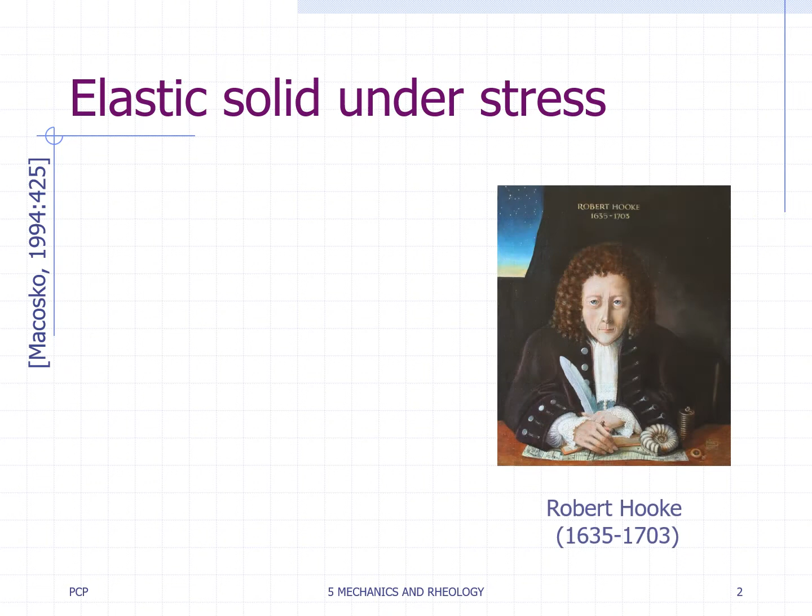Our story begins with an English scientist, Robert Hooke, who discovered a direct proportionality, called the modulus of elasticity E, between the applied stress sigma and the deformation or strain of a solid epsilon. Under these conditions, the object returns to its original shape and size upon removal of the load and might be called a linear elastic or Hookean body.

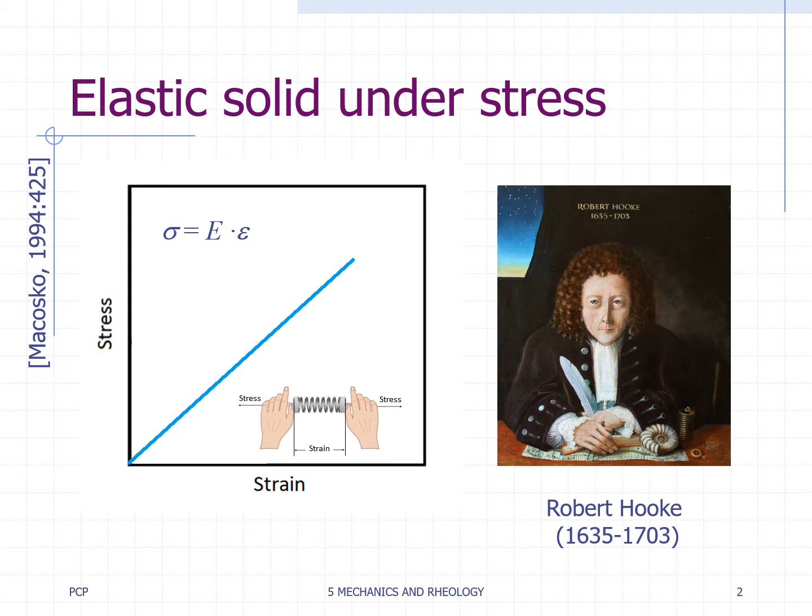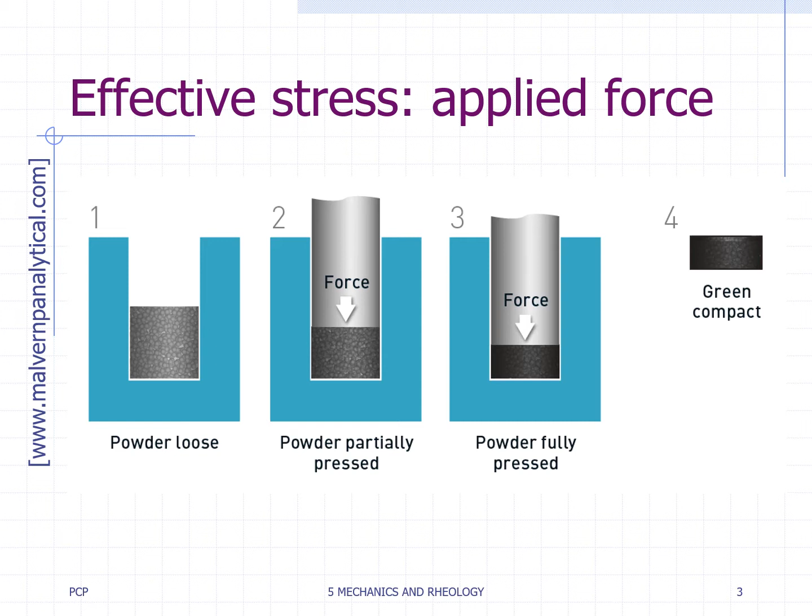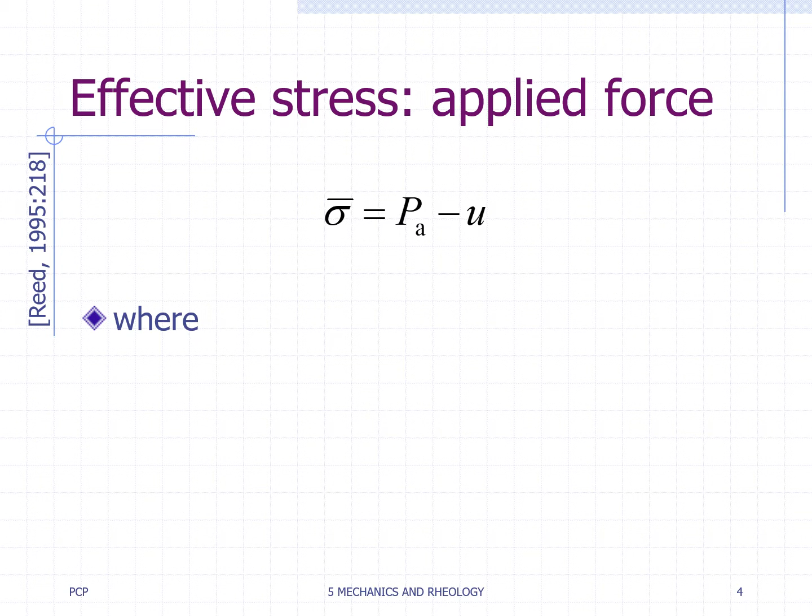Ceramic bodies containing a pore phase incompletely saturated with a liquid can be deformed both elastically and plastically when compressed. For those materials, the resistance to deformation is dependent on the cohesive strength and the frictional resistance between particles. When an unsaturated particle system is compressed, the imposed pressure is supported by the mechanical stress at particle contacts and by the pore fluid pressure. The difference between the applied pressure, Pa, and the fluid pressure, U, is called the effective stress, sigma.

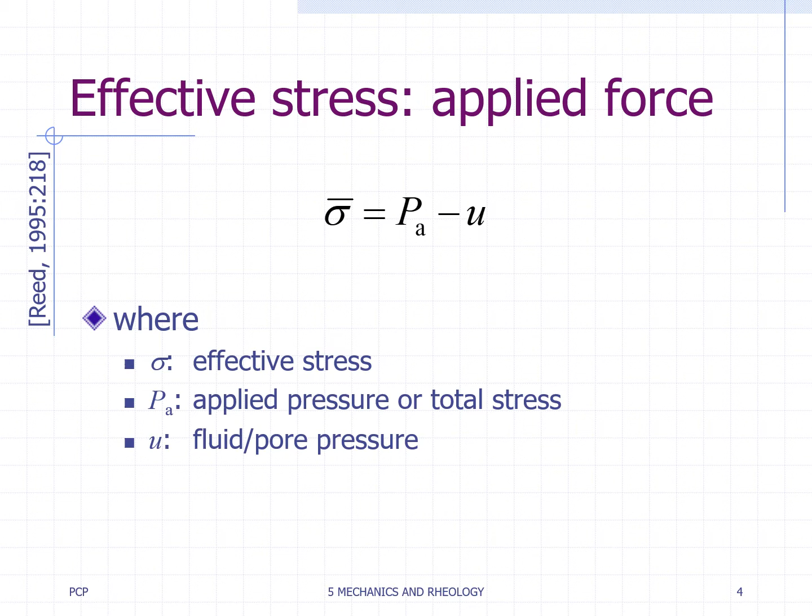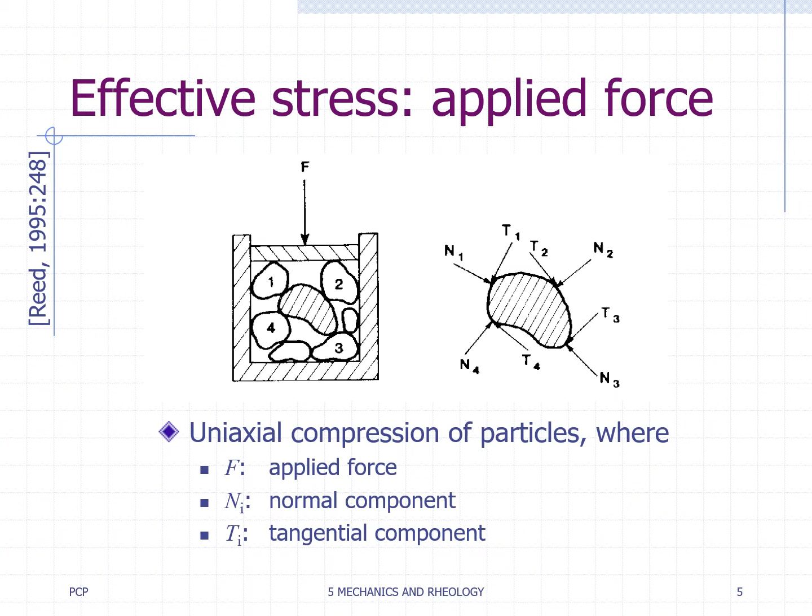Let's consider the uniaxial compression of a system of particles confined in a rigid die, as shown in this figure. The force at contacts between particles may be resolved into normal N and tangential T components. A very intense stress at a particle contact may cause local plastic deformation and fracture. The effective stress is lower when the pore phase is saturated with a relatively incompressible fluid that becomes pressurized, as is indicated in this figure. The chart shows a variation of stresses and porosity on loading a compressible, partially saturated particle system. Permeable pistons or dies may determine the effect of drainage of the pore fluid on the mechanical behavior.

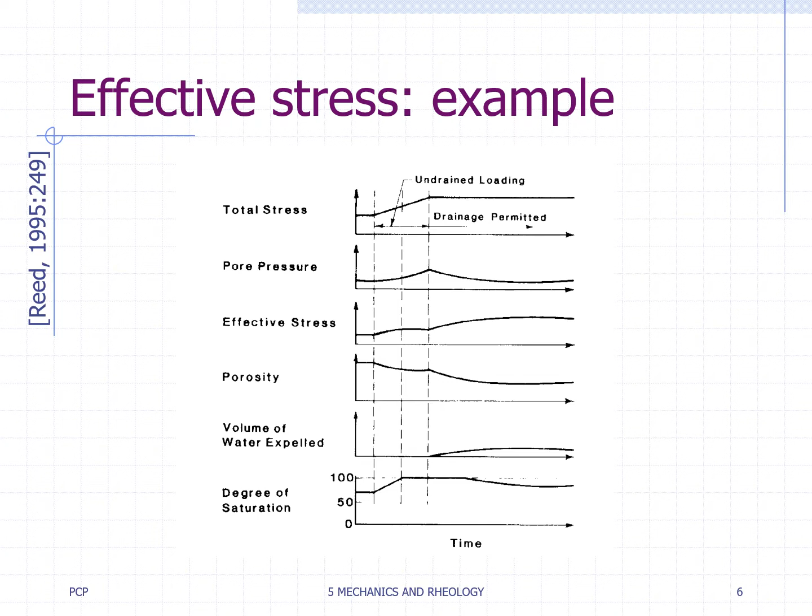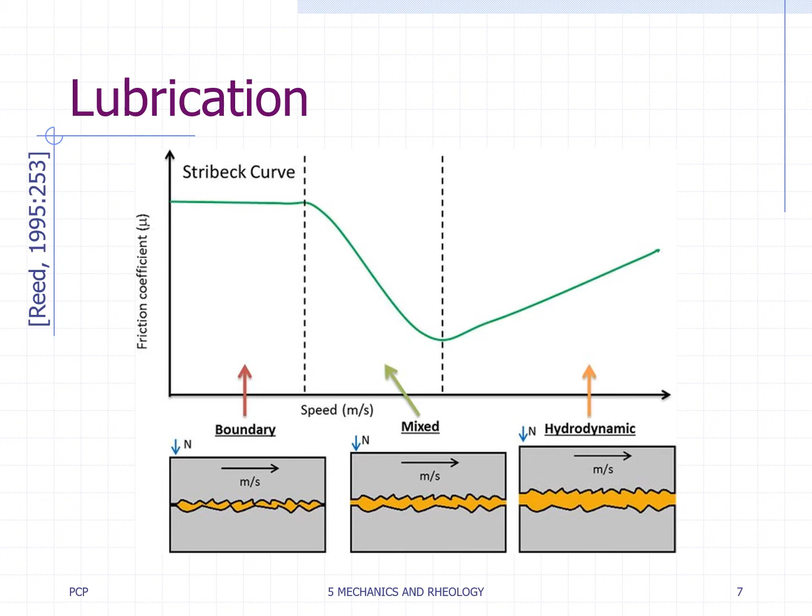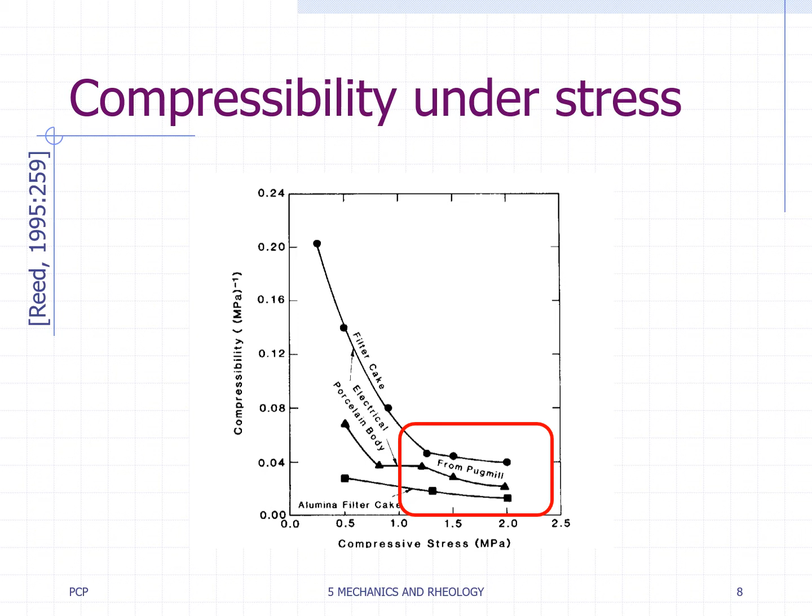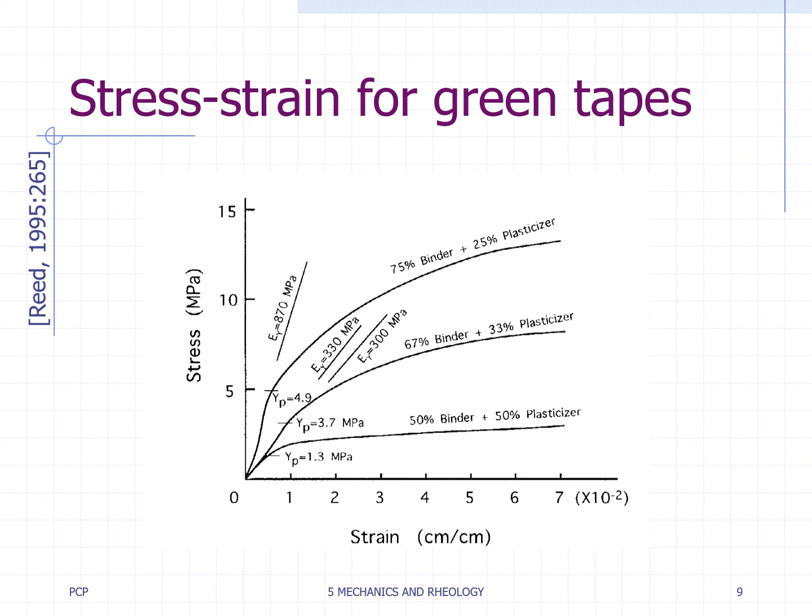A typical stress-strain behavior in simple tension of dried ceramic tapes for electronic substrates shows the effect of increasing plasticizer proportion on decreasing yield point, Yp, elastic modulus, E, and ultimate strength. From now on, we will discuss fundamentals and techniques used to determine the rheological properties of saturated systems, that is, with DPS equal to or larger than 1.

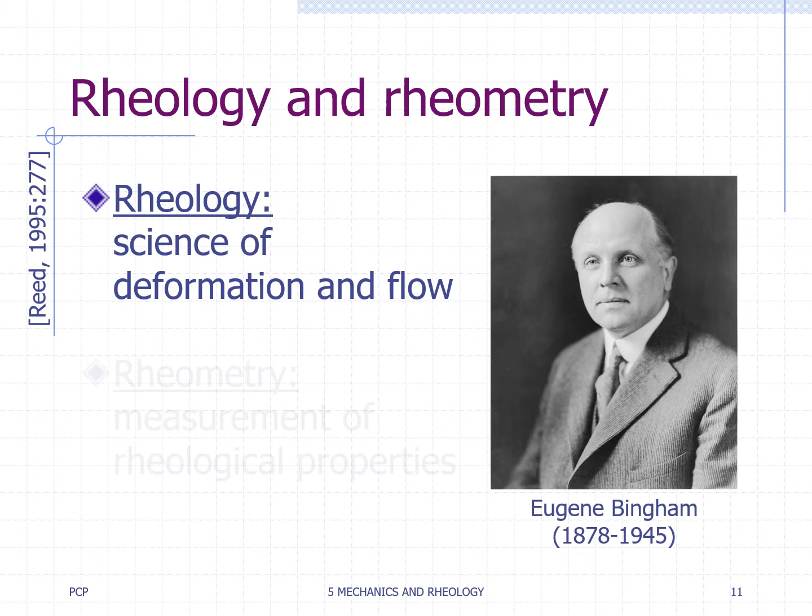By the way, the term rheology is related to the science of deformation and flow, as coined by Eugene Bingham, an American chemist. On the other hand, rheometry refers to the measurement of rheological properties. Rheology is a science that has been defined by many contributions, including from the supposedly two most important physicists ever, Sir Isaac Newton and Albert Einstein.

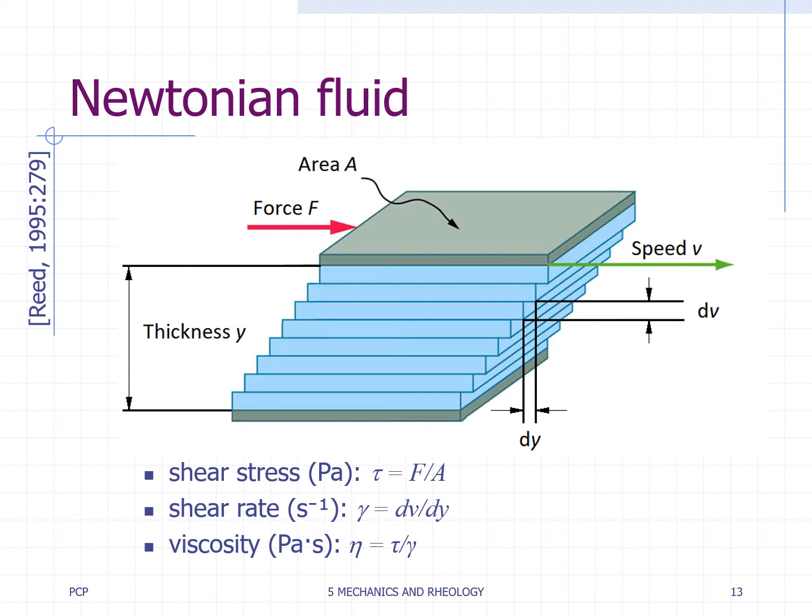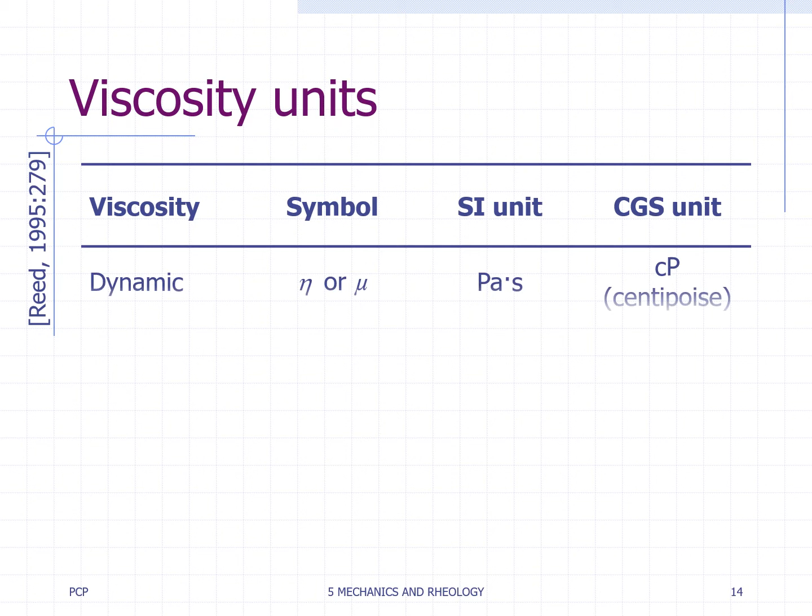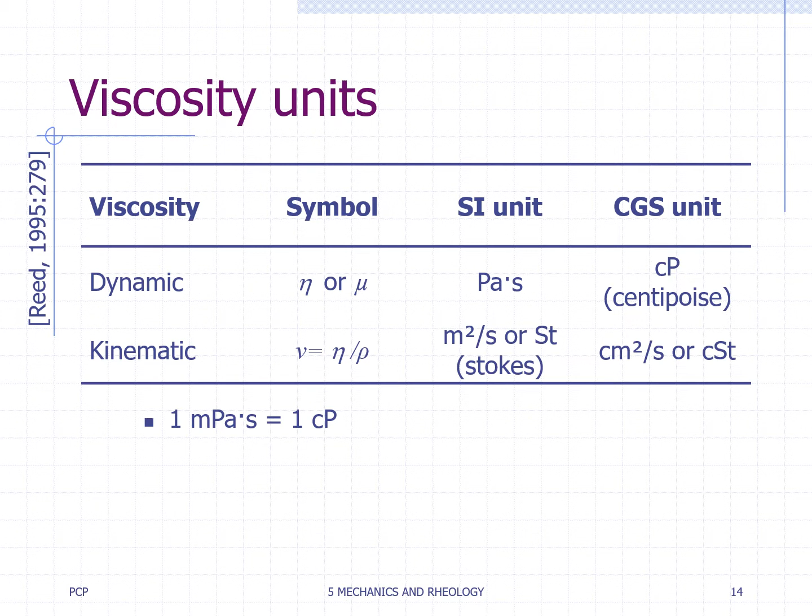The SI unit for dynamic viscosity eta, or μ, is the pascal-second, or millipascal-second. Note that 1 millipascal-second is equivalent to 1 centipoise. The kinematic viscosity is defined as the ratio of the viscosity eta to the density of the fluid ρ, denoted by the Greek letter nu, and often measured in the CGS unit centistokes. Just for the records, the unit poise was named in honor of the French physicist Jean-Léonard Marie Poiseuille, and the unit Stokes was chosen after the Irish mathematician Sir George Gabriel Stokes.

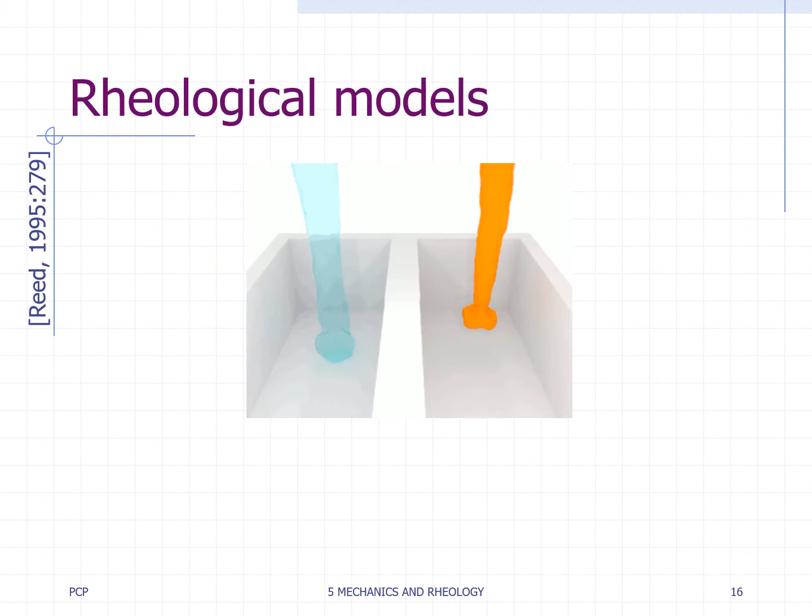Here is a simulation of liquids with different viscosities. The liquid on the right has higher viscosity than the liquid on the left. For instance, at 25 degrees C, water has a viscosity of 1 millipascal-second, or 1 centipoise, while a motor oil would be 100 to 1000 times more viscous.

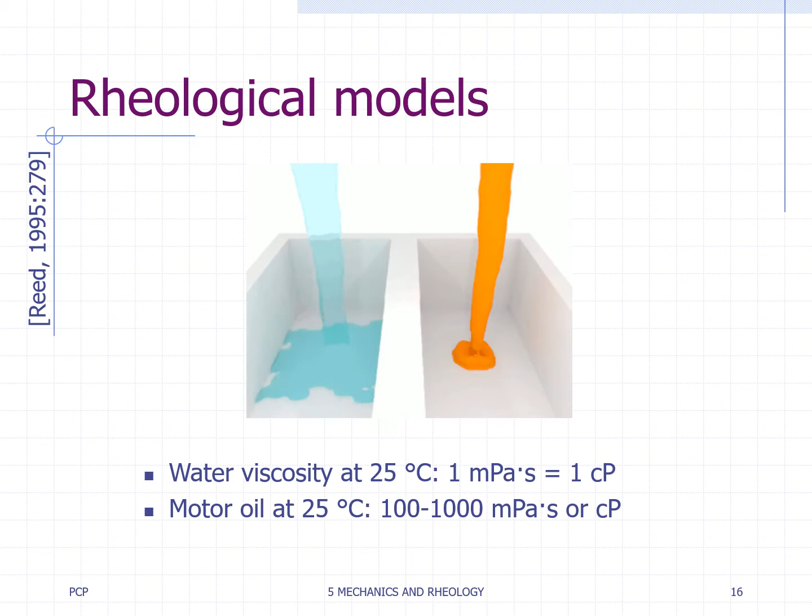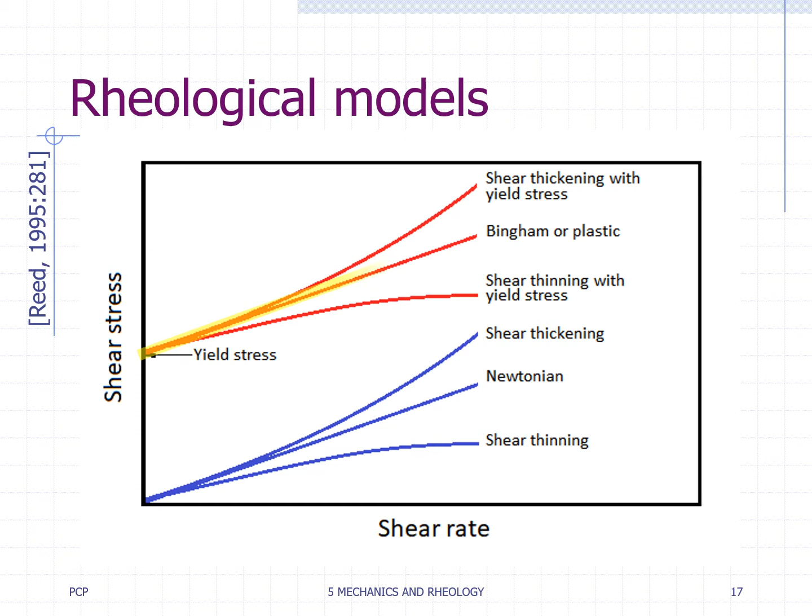Let's skip to some rheological models. Starting from zero shear stress and shear rate, when there is a linear correlation, the liquid is said to be Newtonian, such as water, and the constant of proportionality is the viscosity. When the viscosity decreases with the shear rate, it's known as pseudoplastic, or shear thinning. When the viscosity increases with the shear rate, it is dilatant, or shear thickening. If the yield stress is higher than zero, and there is a linear correlation between shear stress and shear rate, we call it a Bingham or plastic behavior.

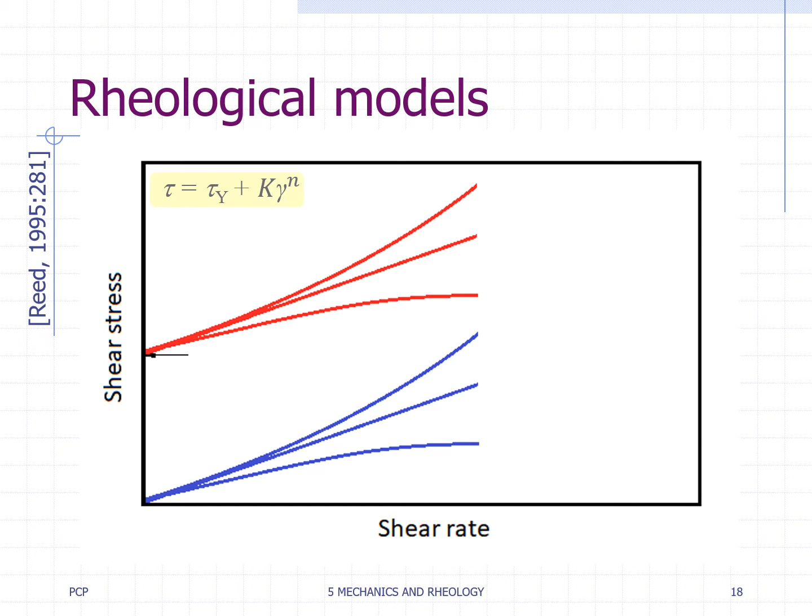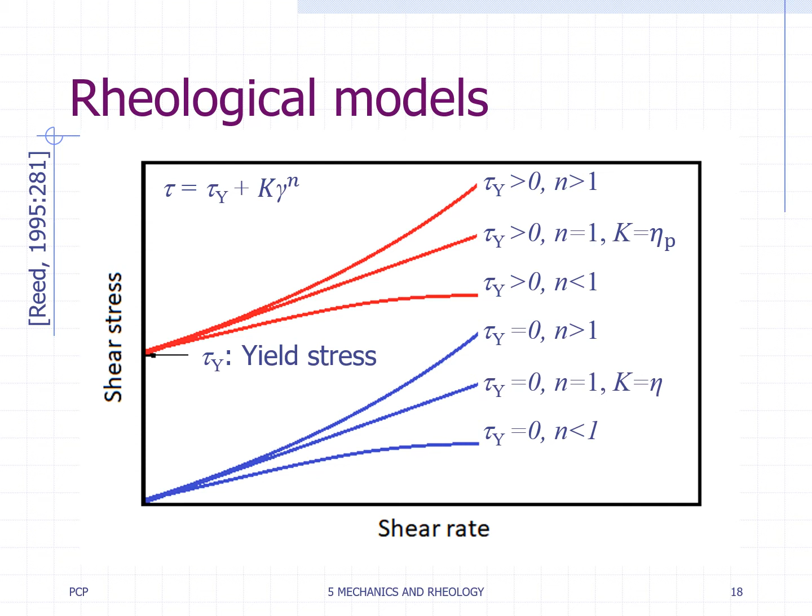A general equation describing those behaviors is the so-called Herschel-Bulkley model, where tau is the shear stress, gamma the shear rate, tau y the yield stress, k the consistency index, and n the flow index. If tau y is larger than tau, the Herschel-Bulkley fluid deforms as a solid, otherwise it flows as a liquid. For n lower than 1, it is shear thinning, whereas for n greater than 1, it is shear thickening. If n equals 1 and tau y equals 0, this model reduces to the Newtonian fluid.

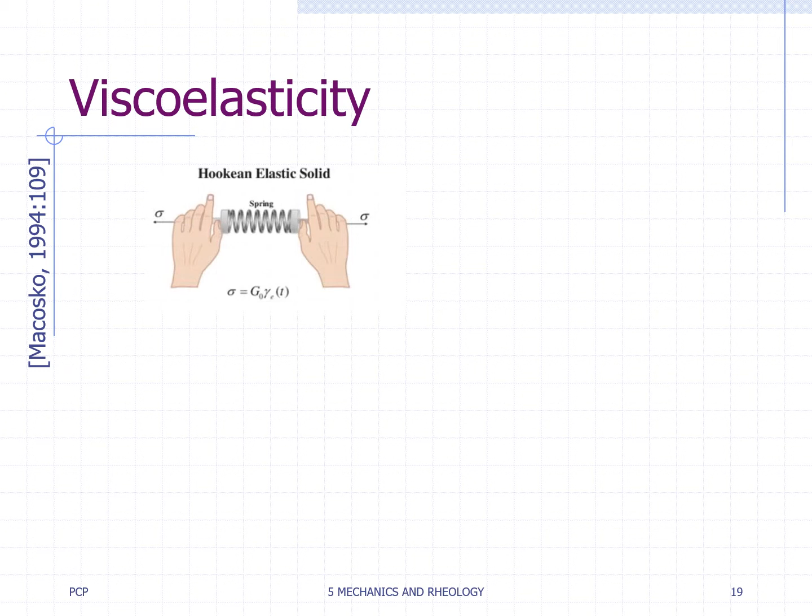Ideal elastic or Hookean materials strain when stretched and immediately return to their original state once the stress is removed. Ideal viscous or Newtonian liquids, like water, resist shear flow and strain linearly with time when a stress is applied. Viscoelasticity is the property of materials that exhibit both elastic and viscous characteristics when undergoing deformation.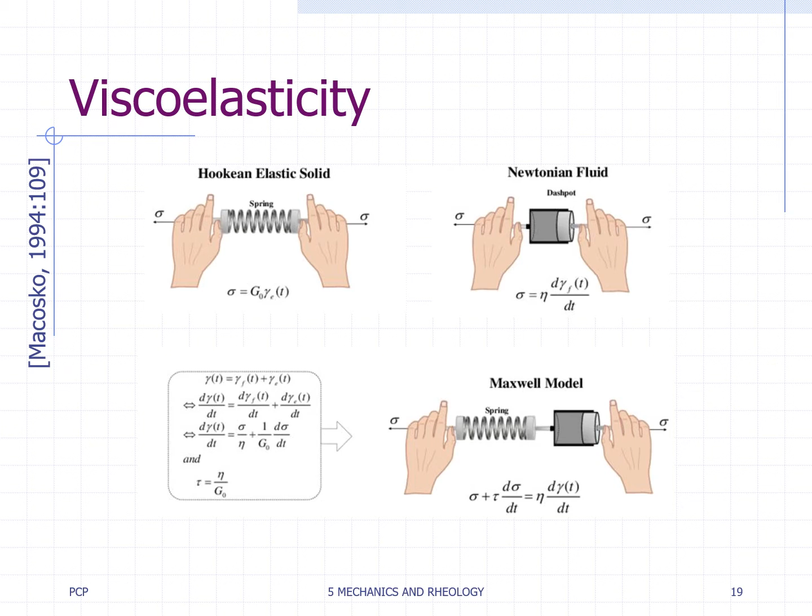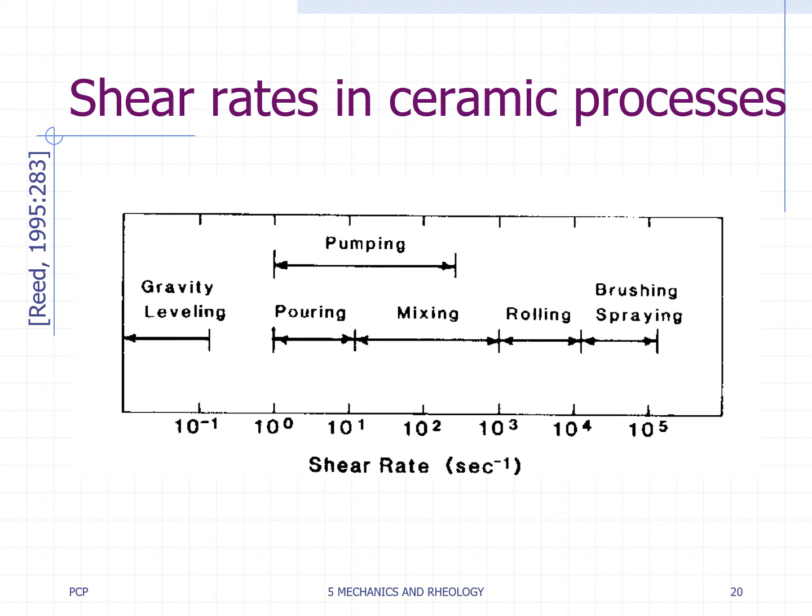Ranges of shear rate encountered in ceramic processing operations are indicated in this figure. Rheological data are more relevant when the viscosity is determined in the range of shear rate of the process. The rheological behavior discussed so far was assumed to be independent of the shear history and shearing time.

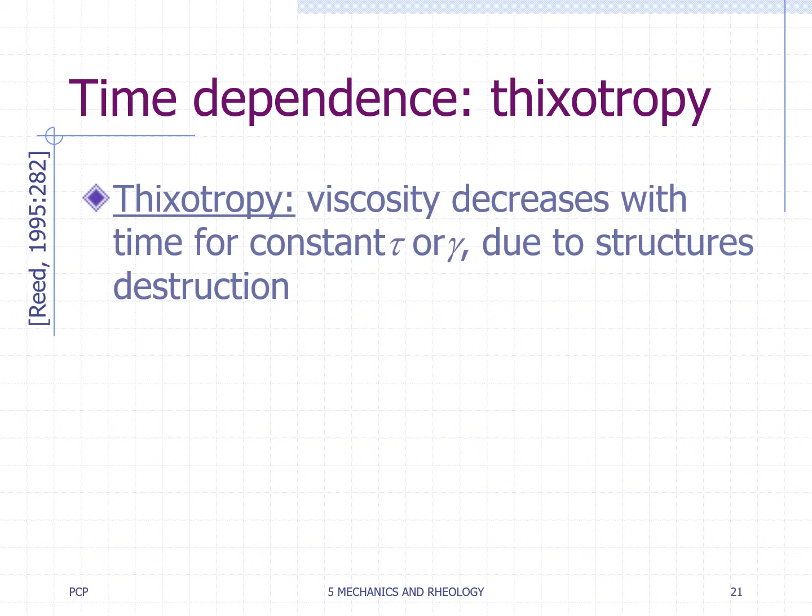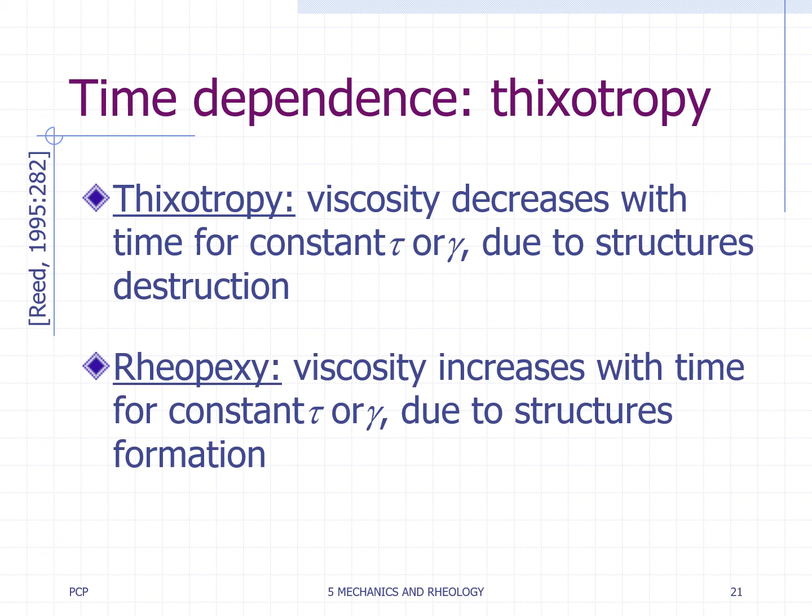For some materials, the viscosity at a particular shear rate may decrease with shearing time. This behavior, called thixotropy, is commonly observed for shear thinning materials, when the bonding of molecules or particles breaks apart with time during shear flow. A few materials exhibit an increase in viscosity with time when sheared at a constant rate. This behavior is called rheopexy and may be expected when agitation enhances bonding between structural units in the suspension.

Thixotropic behavior in ceramic slurries is often reversible. For a thixotropic material with a yield stress, the apparent yield strength is higher after the suspension has been at rest and a particle structure has reformed. This higher apparent yield stress after a period of rest is often called the gel strength.

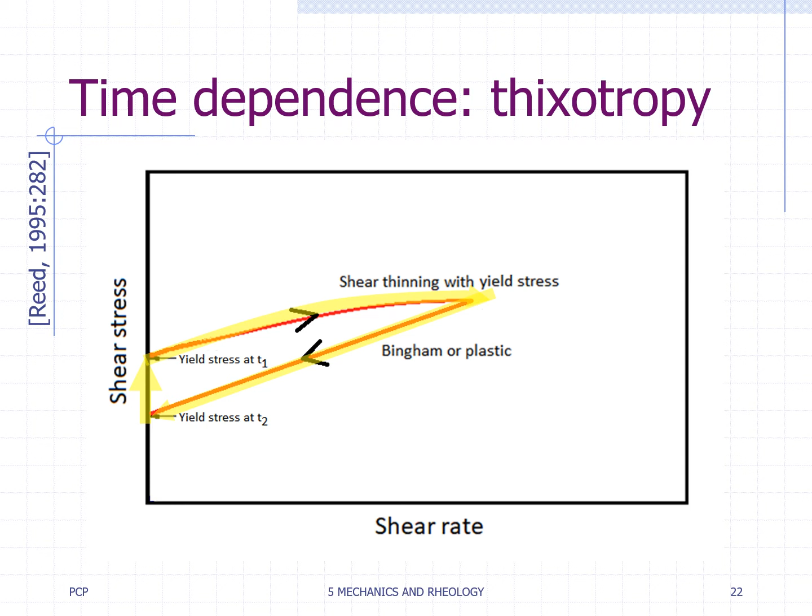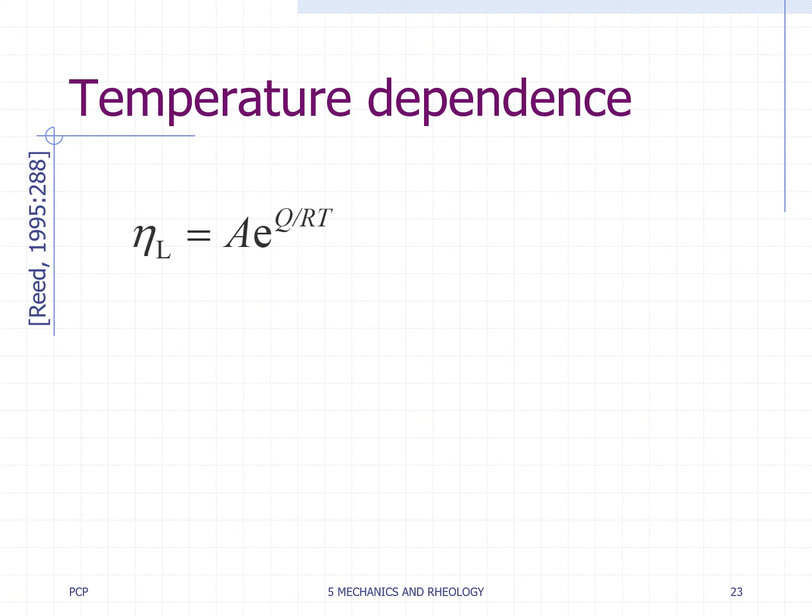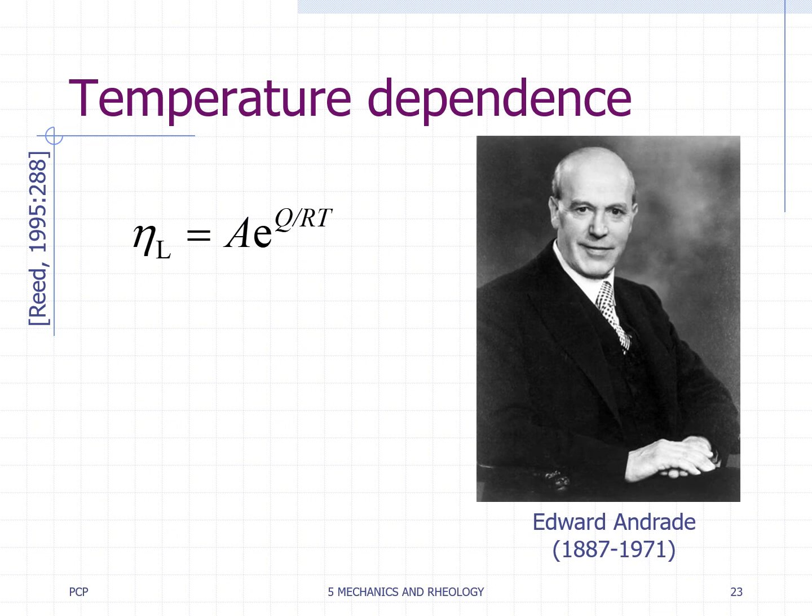Heating increases the specific volume and reduces the viscosity of simple liquids. The variation of viscosity over a limited temperature range is approximated by the equation known as the Andrade equation, due to the English physicist of Portuguese origin, Edward Andrade. In this equation, A and Q are constants for a particular liquid.

The viscosity of a suspension, eta S, is greater than the viscosity of the liquid medium, eta L, in the suspension, and the ratio is referred to as the relative viscosity, eta R. For a very dilute suspension of non-interacting spheres in a Newtonian liquid, the viscosity for laminar flow is described by the Einstein equation as a function of the particle volume fraction.

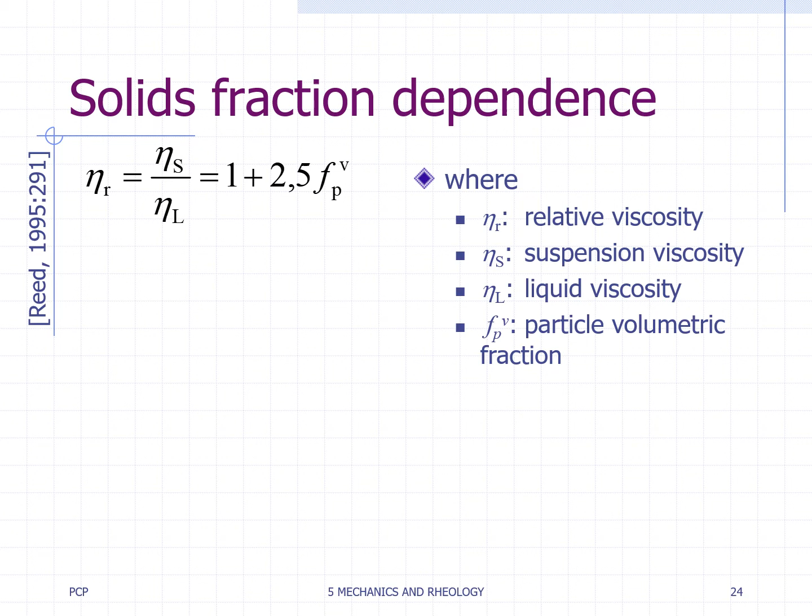A more general equation for the viscosity of a suspension of non-spherical particles introduces Kh as the apparent hydrodynamic shape factor of the particles. In suspensions of particles with an aspect ratio greater than 1, particle rotation during flow produces a larger effective hydrodynamic volume and Kh over 2.5. Rheological data for suspensions of uniform spherical colloidal particles are often approximated by the Dougherty-Krieger equation, where Fcr is the critical volume fraction at which flow is blocked.

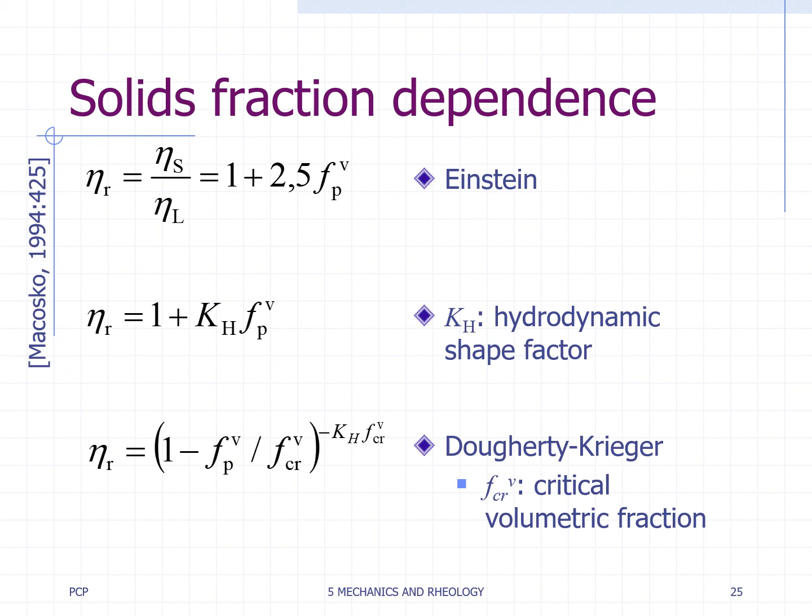The Einstein equation applies to volume fractions less than 0.01, assuring that the flow around a particle does not influence the velocity field of any other particle. At higher particle concentration, the hydrodynamic interactions between particles become important. In those cases, the Dougherty-Krieger equation may be applied.

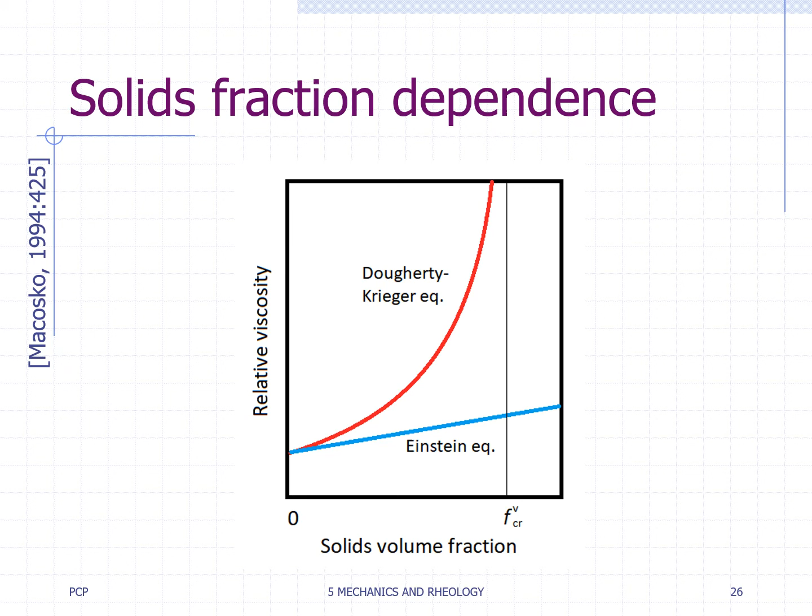Some common devices used for measuring viscosity in ceramic suspensions are summarized in this table. The Ford cup is a simple gravity device used to determine the timed flow of a known volume of liquid passing through an orifice located at the bottom. The least expensive commercial variant of the controlled rate rotational viscometer is commonly referred to as a Brookfield type. This device measures fluid viscosity at fixed rotation speeds by driving a measurement tool, or spindle, immersed in the test fluid through a calibrated torsion spring.

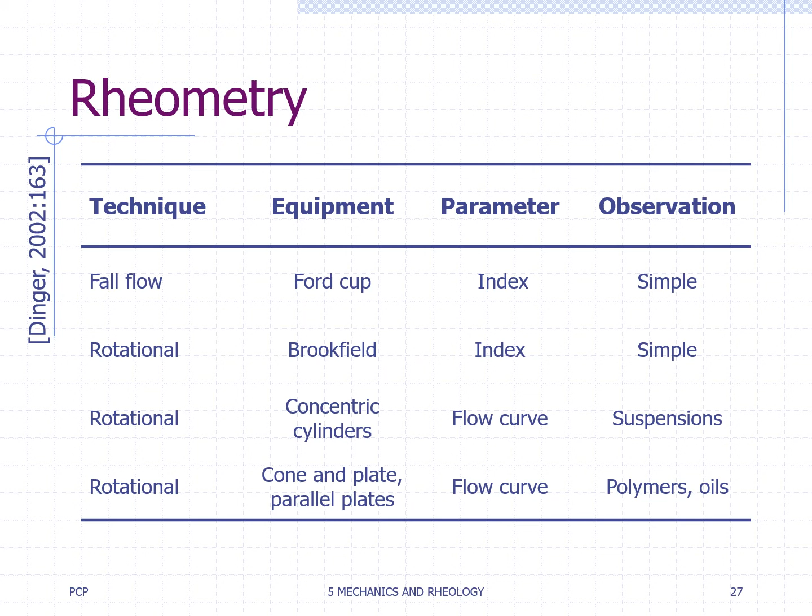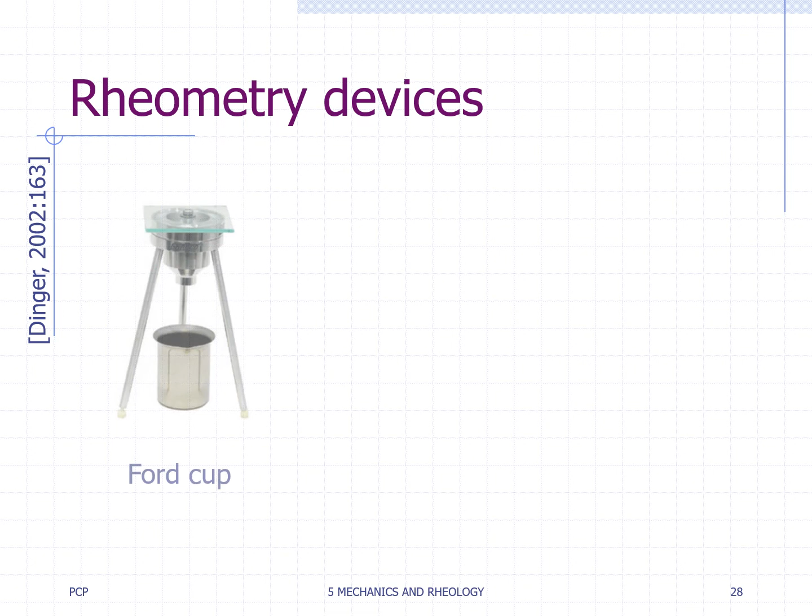High-precision shear instruments in which the test fluid is sheared under controlled stress or controlled rate conditions are termed rotational rheometers. Most rheometers depend on the relative rotation about the common axis of one of three tool geometries: concentric cylinders, cone and plate, or parallel plates. Here, we may compare simple rheometry devices such as a Ford cup and a Brookfield type viscometer with a complex advanced rheometer, in this case with parallel plates geometry.

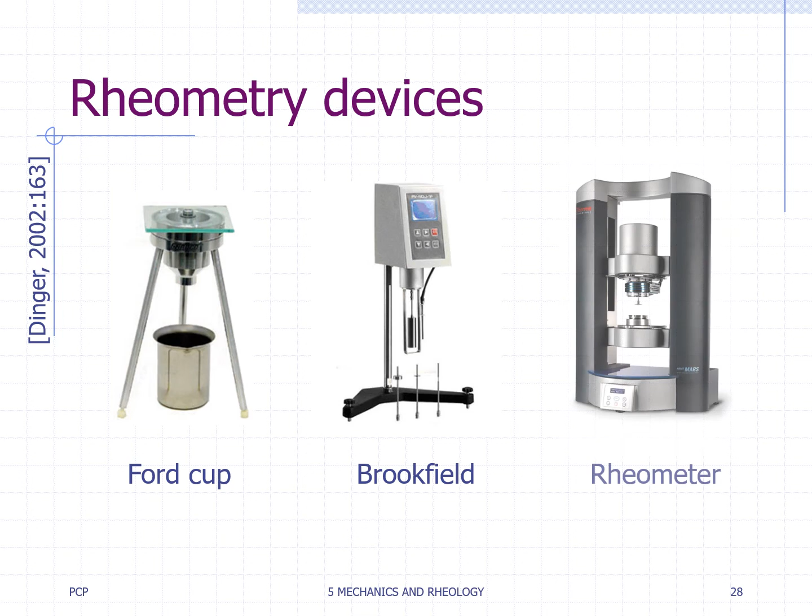Now, some exercises on mechanics and rheology. Questions.

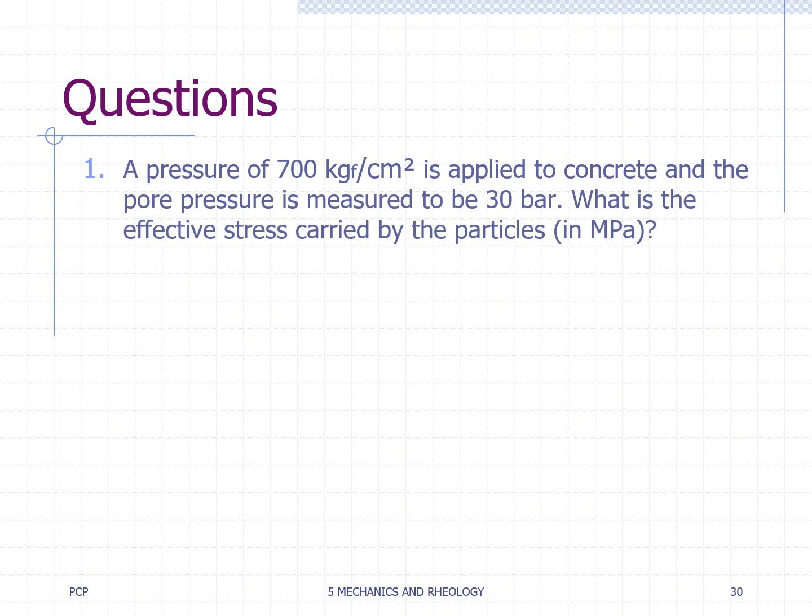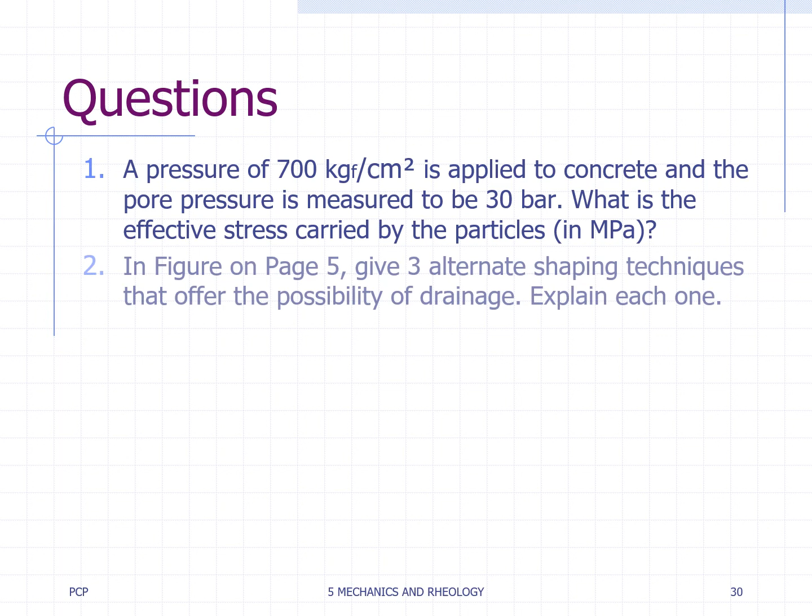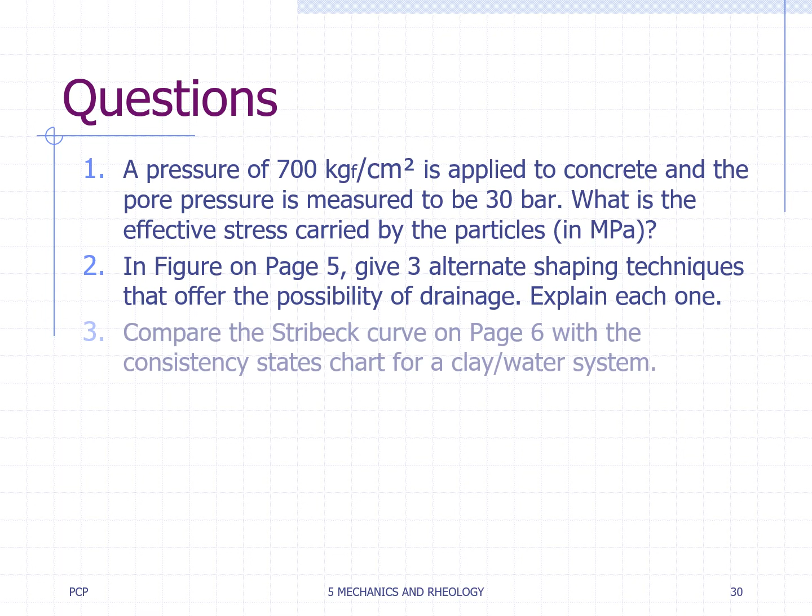A pressure of 700 kilograms force per square centimeter is applied to concrete and the pore pressure is measured to be 30 bar. What is the effective stress carried by the particles in megapascals? In the figure on page 5, give 3 alternate shaping techniques that offer the possibility of drainage. Explain each one. Compare the Stribeck curve on page 6 with the consistency states chart for a clay water system.

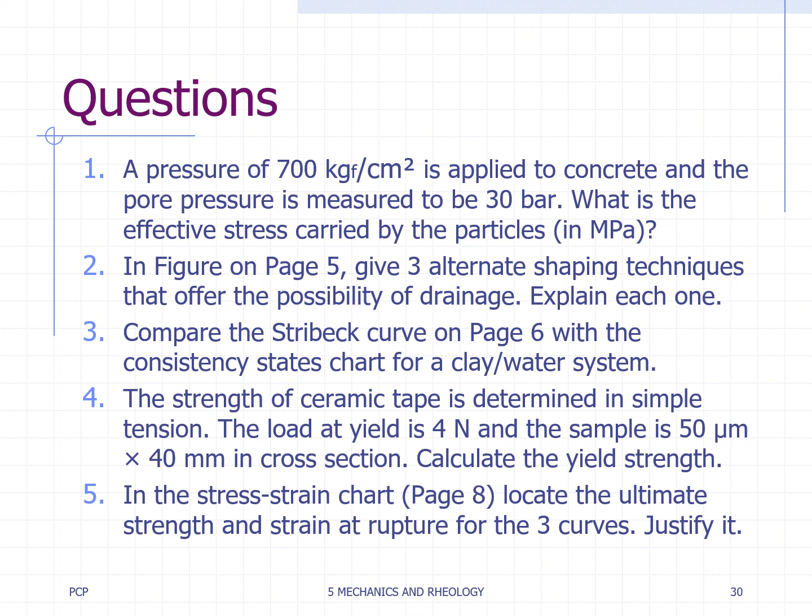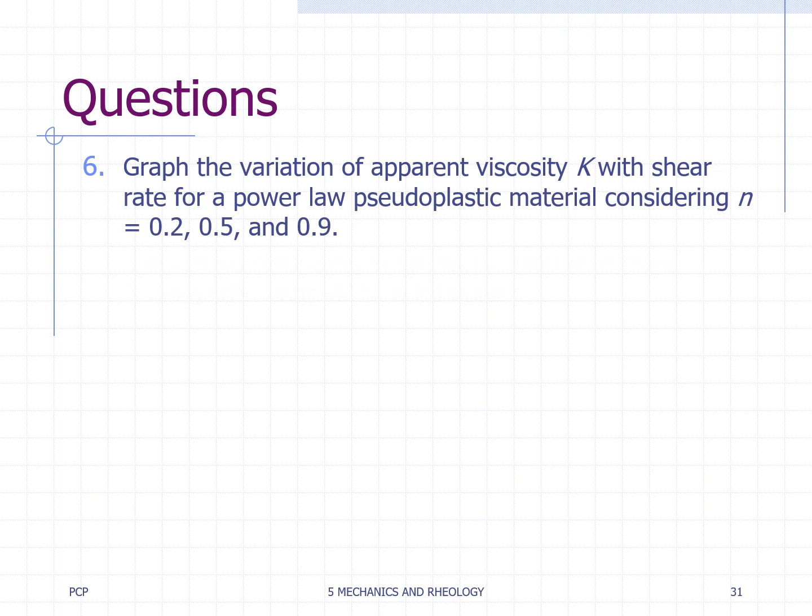The strength of ceramic tape is determined in simple tension. The load at yield is 4 Newton and the sample is 50 micrometer by 40 millimeter in cross section. Calculate the yield strength. In the stress strain chart, page 8, locate the ultimate strength and strain at rupture for the 3 curves. Justify it. Graph the variation of apparent viscosity with shear rate for a power law pseudoplastic material considering n equal 0.2, 0.5, and 0.9.

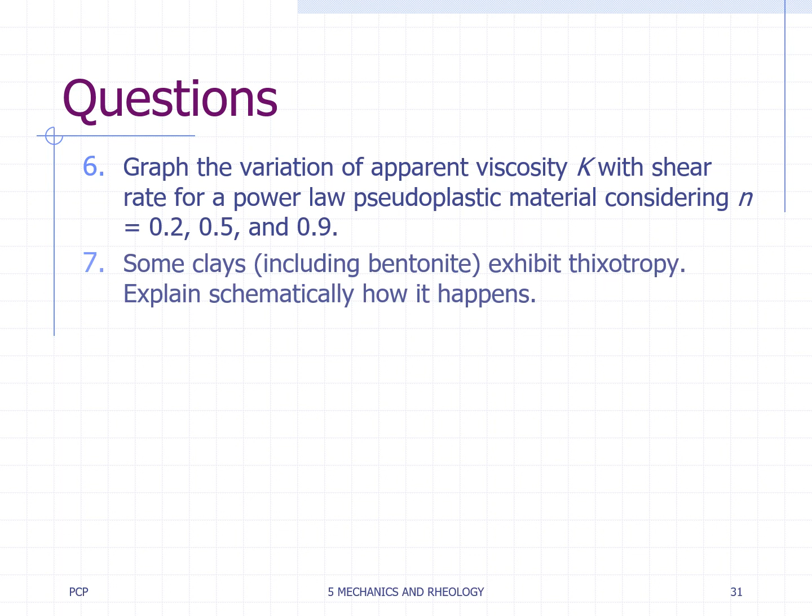Some clays, including bentonite, exhibit thixotropy. Explain schematically how it happens. Estimate the viscosity of water at 10 and 40 degrees C. Consider A equal 1.25 times 10 raised to negative 3 millipascal second and Q over R equal 1970 Kelvin.

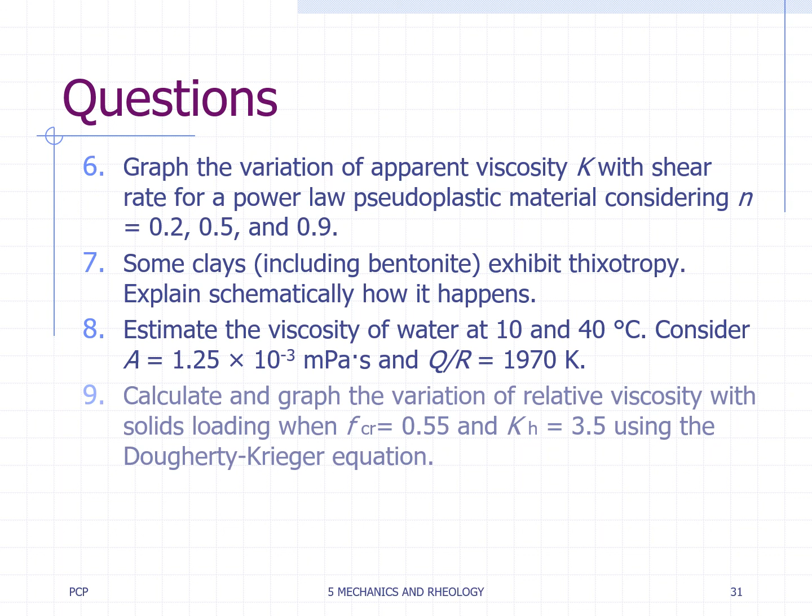Calculate and graph the variation of relative viscosity with solids loading when Fcr equals 0.55 and Kh equals 3.5 using the Dougherty-Krieger equation. Explain why a Brookfield type viscometer cannot be considered a rheometer.